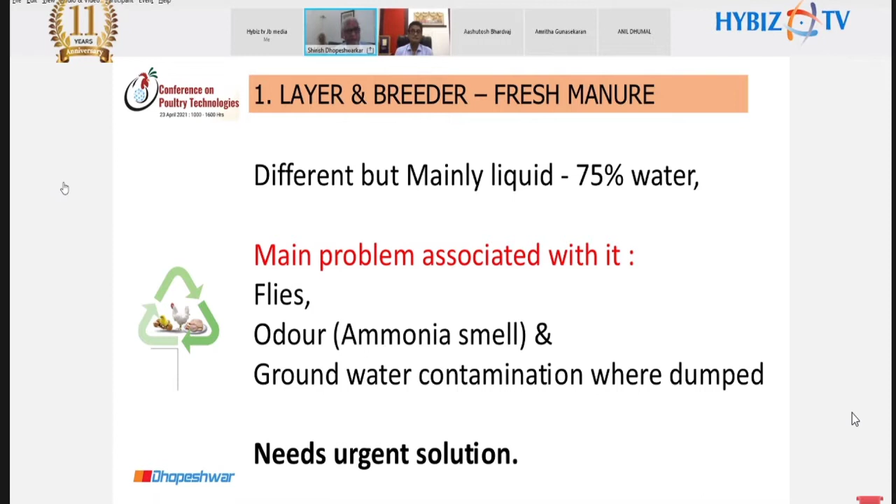Of water, it will leach into the ground and it will damage the groundwater in that land where it has run off. So this requires an urgent solution.

For example, layer manure. Layer farm of 1 lakh birds, as I said earlier, equals 10 tons of fresh manure per day, equal to 3,650 tons per year. And big farms have 3 to 10 lakh birds. Some companies have even more.

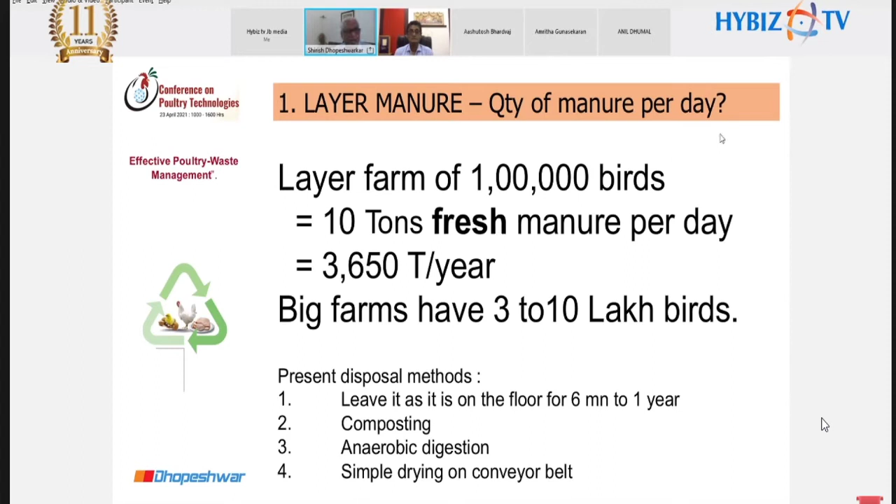So present disposal methods: they leave it as it is on the floor for 6 months to 1 year. Some use some part for composting, some go for anaerobic digestion, and some simply dry it on a conveyor belt, which is one of the old technologies, but not very effective, and it takes a long time to get it composted.

The breeder farm manure is slightly more fibrous and slightly different in physical nature, but both have water as the main ingredient, 75% water. It is not 75% moisture, 75% water. That means in 100 kg of this fresh manure, the solid content would be hardly 25%. So what we call it is DM 25, dry matter 25 in the manure.

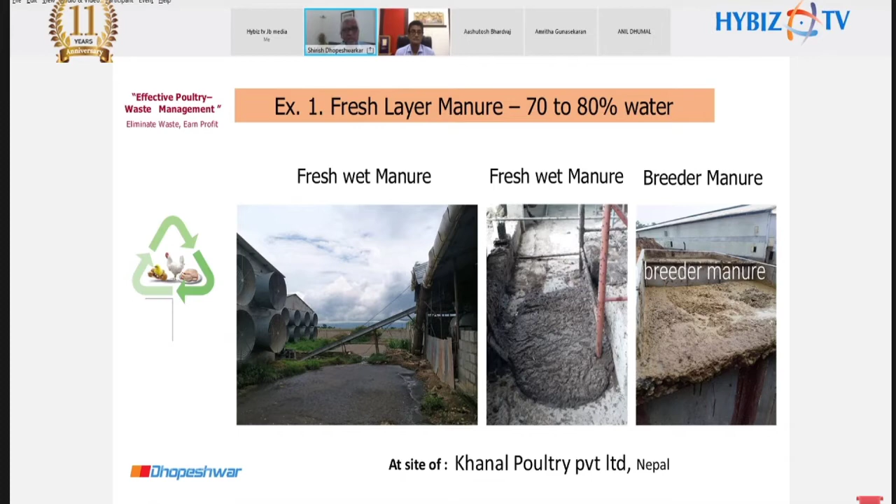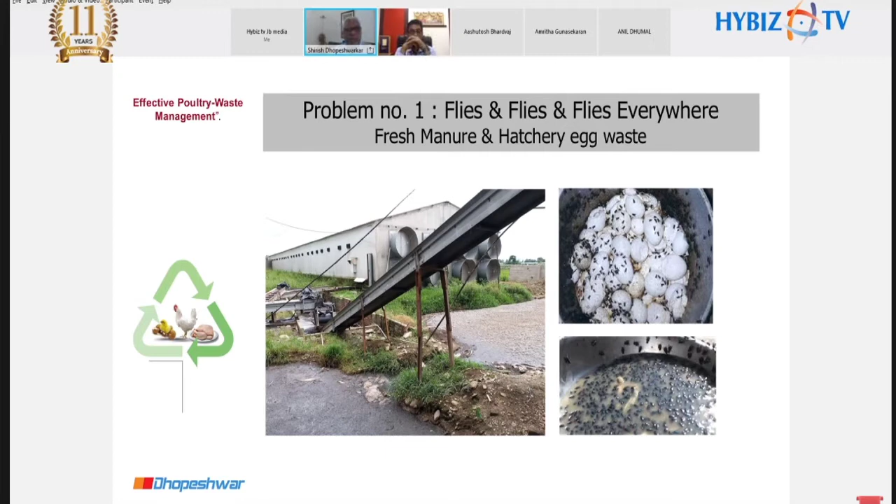And what are the problems associated with this manure, even at the farm level? Problem number 1, there are flies everywhere, both on the fresh manure as well as on the hatchery egg waste. And if you are thinking flies are the only problem from poultry manure, you would be shocked. It is not. Other problems are ammonia odor. It affects not only the birds in the shed, it affects the people nearby, the groundwater contamination, as I said earlier, and the bacterial contamination.

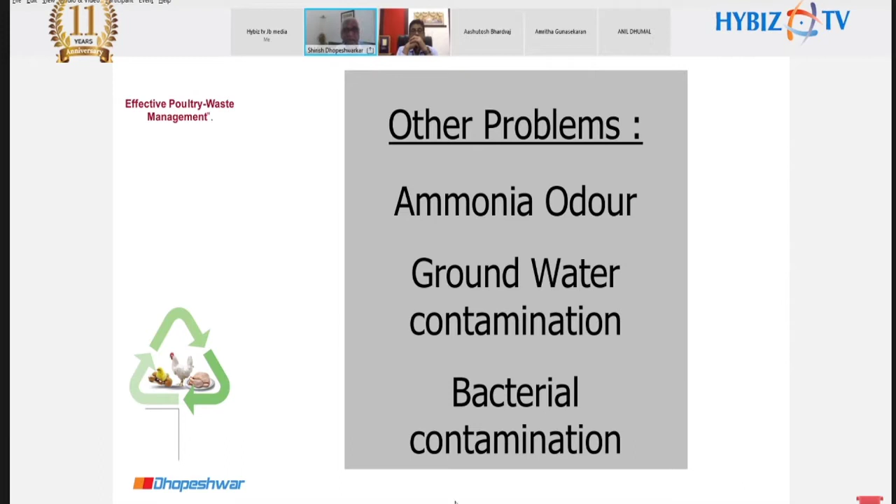Other problems due to poultry waste: we all know poultry waste is somehow being disposed of unauthorizedly, illegally. They simply throw it in the fish ponds, and the fish eat chicken which has live bacteria in it, and the fish comes back to the consumer's table. We have no doubt our cooking involves very hot cooking and pressure cooking and all that, but it still comes onto the table near to us. Similar problems are faced due to hatchery waste and slaughter plant waste.

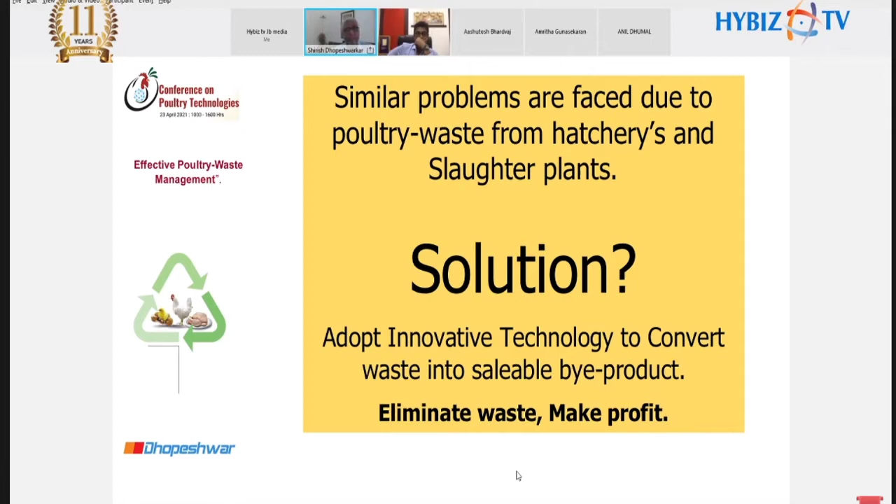And so what is the solution? The only solution is to adopt innovative technology to convert waste into a sellable byproduct. So the solution will eliminate the waste and make profit. One of the solutions would be the digester-based clean and green technology for converting poultry waste into sellable products.

And the sellable products: manure to organic fertilizer, hatchery waste to eggshell meat meal, slaughter waste to meat meal. The meat meal made from slaughter waste has approximately 55 to 60% protein and 20% fat. It can be used to the extent of 10 to 12% in feed; where we use soya cake, you can substitute some part, and where you use oil, you can use it because that gives energy.

So the solution involves an advanced 3-in-1 digester. This is a 3-in-1 digester because it is a pressure cooker and it is a homogenizer. You see the front end and you see the back end. The back end extends to a heavy duty stirrer and gearbox, which drives the heavy duty stirrer inside to homogenize.

So when you cook the slaughter waste under pressure, for example, the feather gets hydrolyzed under pressure. So all the waste, from the bones to intestine to feather, gets homogenized. And when you get the meat meal out, it is a homogenized product without a trace of feather. So this digester is a pressure cooker, it's a homogenizer, and in the case of this particular digester, it's a vacuum dryer.

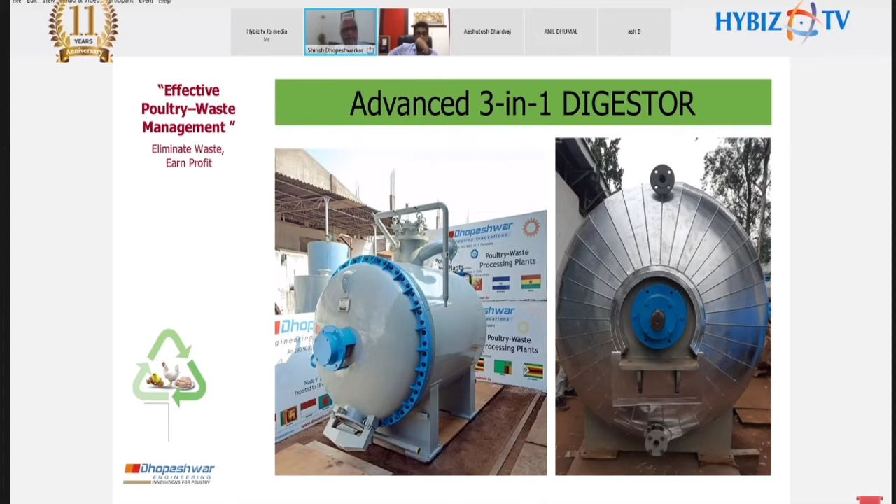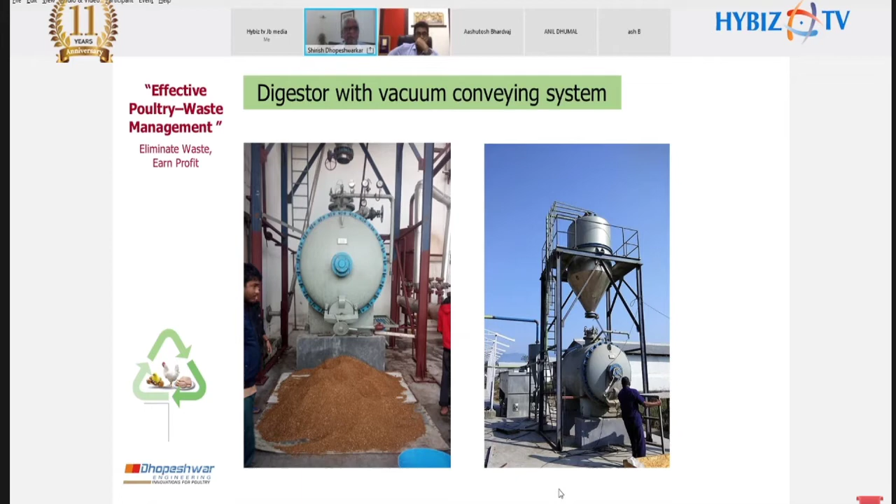And what does this digester-based technology do? It adopts HTST process, high temperature, short time process, to pressure cook poultry waste, eliminate bacteria, homogenize and sterilize waste, and vacuum dry the waste into final product. Here, I would like to just explain a bit.

The bacteria in poultry waste, the Salmonella and E. coli, as per the EU norms, need to be eliminated at about 120 to 140 degrees centigrade by keeping the temperature constant for about 20 minutes onwards. So this pressure cooker does that. That's why it is high temperature, 120 to 140 degrees, and short time, 20 to 40 minutes.

So it is HTST. And this plant consists of, number one, the homogenizer cooker dryer, a steam boiler, an odor control system, a vacuum system for energy efficiency, a dry meat meal bagging system, and other peripherals.

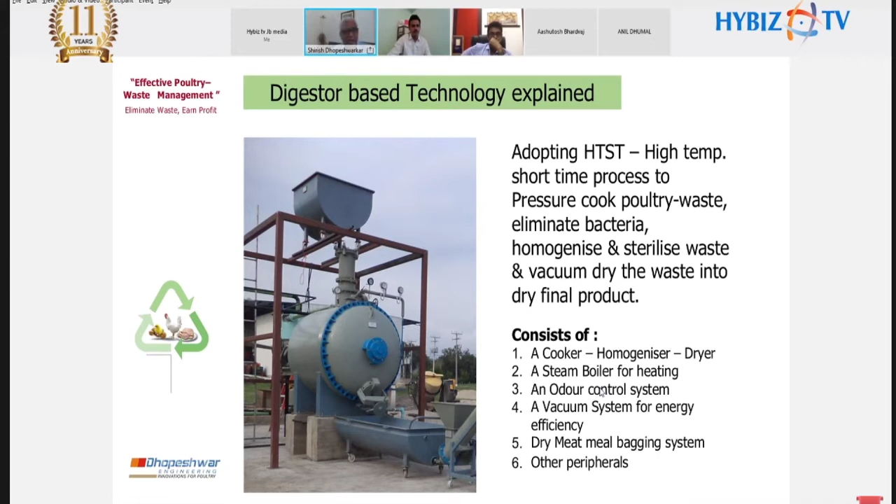Solution 1 for the poultry waste management for, say, fresh manure. The digester-based technology converts fresh liquid manure into dry, baggable powder or pellet on the same day. The problem with manure is you cannot store it. If you store it, it will attract flies and also give a lot of smell, and it will also give groundwater pollution. So you cannot bag it, you cannot keep it. So if you can make baggable powder out of it on the same day, it would eliminate the waste at its source on the same day.

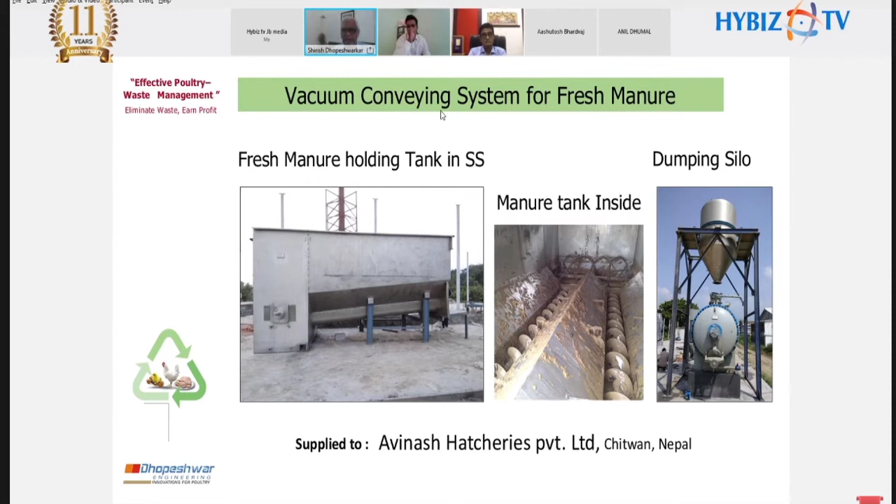This is the vacuum conveying system because they have about 30 tons of manure every day. And loading the manure manually is simply a very difficult task. So this is a vacuum conveying system which goes from the floor level stainless steel tank with the screw conveyor, and ultimately with the vacuum it is conveyed to the stainless steel silo located on top of the digester. So the vacuum conveying reduces the labor and does it without really involving labor and all the dirt associated with it.

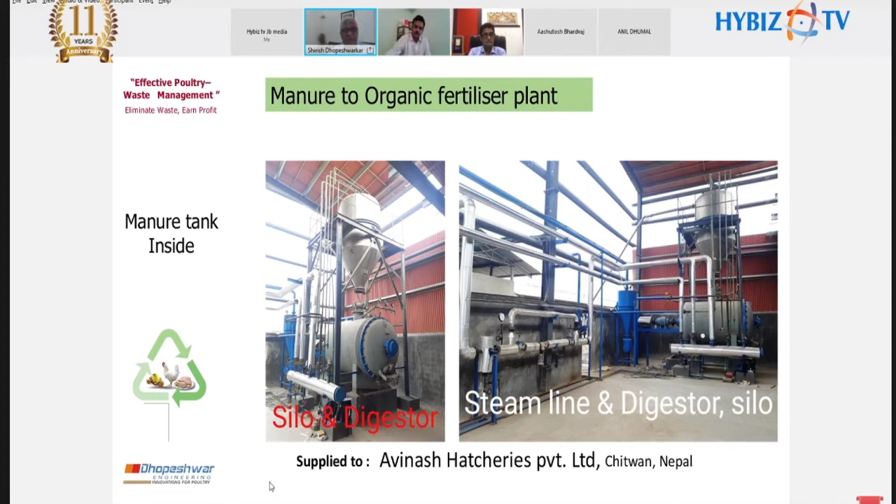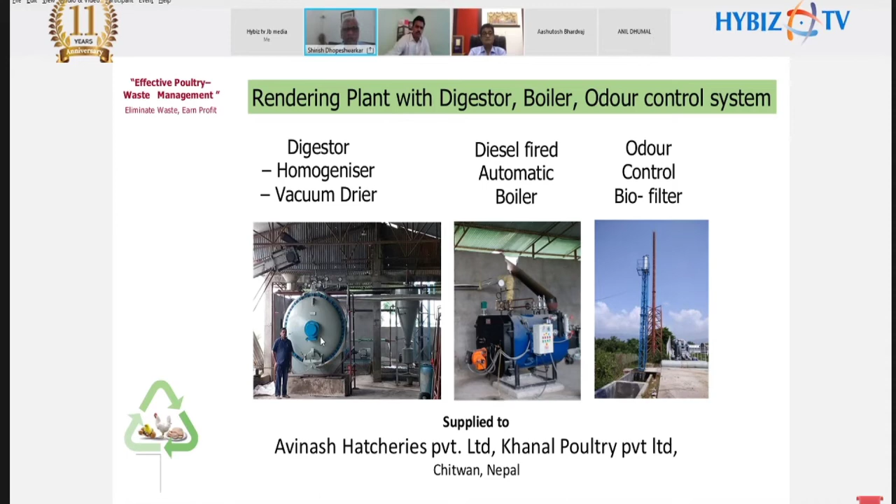This is the system again at the Avinash Farm, Chitwan, Nepal. You can see the plant, the shed, the boiler system, which is on another shed. And as I said earlier, the different components of this system are the digester homogenizer, the boiler, and the odor control system, which has a unique 32 feet high barometric tower to take the vapors there and condense it. So whatever vapors are condensable, they are condensed, and you do not get the smell in the plant or around the area. So it's a very effective odor control system, and these have been set up in different countries.

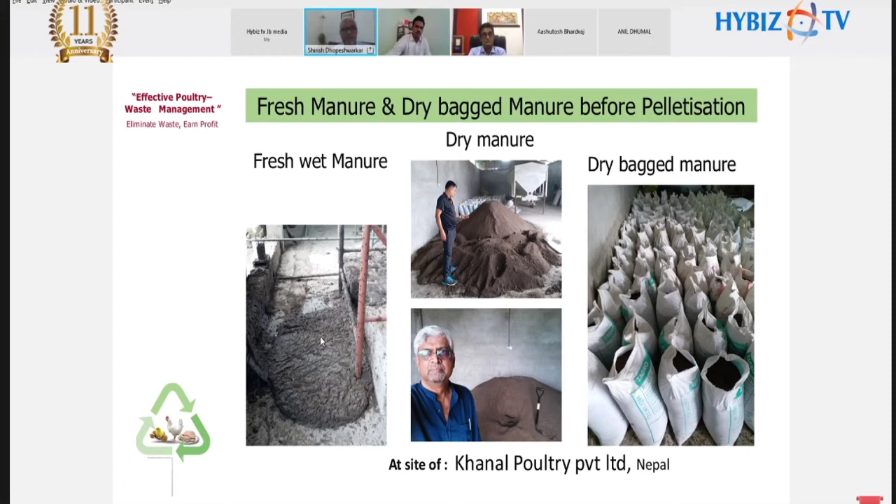What does the dry manure look like? Fresh manure looks so wet, it's slushy. The dry manure you can see, and it has been bagged. You can bag it the same day, you can bag it after cooling, but basically you can bag it, store it, keep it.

So with the bagging, you can also go to the next level, which is pelletizing. Pelletizing is required for marketing the poultry manure, because the adulteration will be very less. And you can do the pelletizing as you can see in the photographs. So the pelletizing reduces losses and it reduces chances for adulteration.

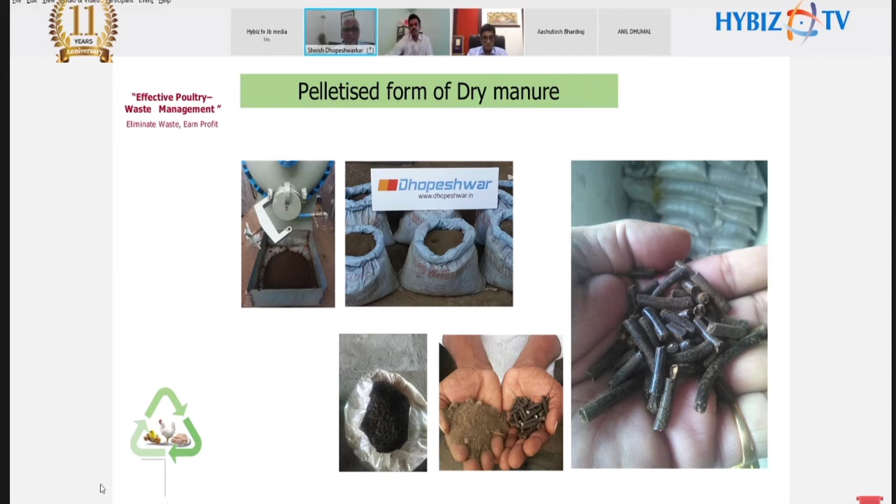And most important, the nitrogen, when you broadcast the pellets in the farm, the nitrogen in it is released slowly. When you water it, the nitrogen gets released slowly, not at a time, slowly. So that helps the plant to absorb it. So you can say pelletizing, in fact, gives a much better value than just dry powder.

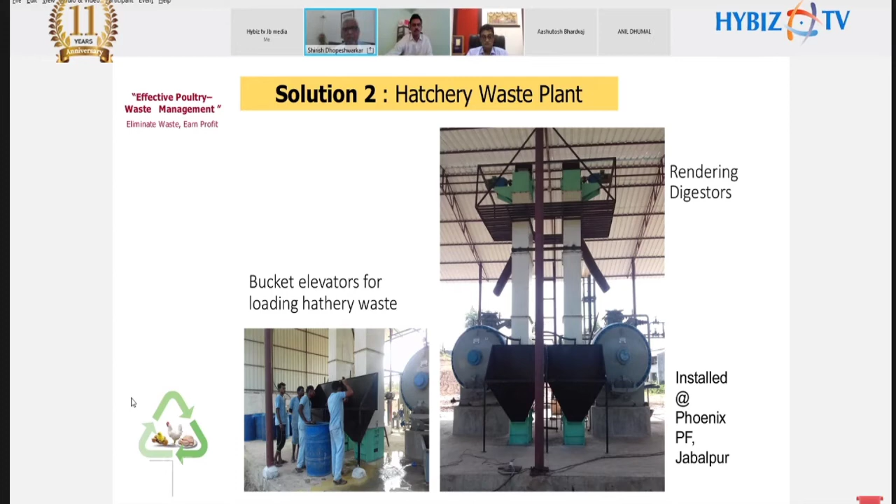Solution 2 for the second waste is the poultry hatchery plant. These are the plants at Phoenix Farms, Jabalpur. You can see the bucket elevator for conveying and also the digester for hatchery waste. These are the hatchery waste plants at Venky's, Ludhiana and Allahabad, and S.R. Hatcheries, Hyderabad.

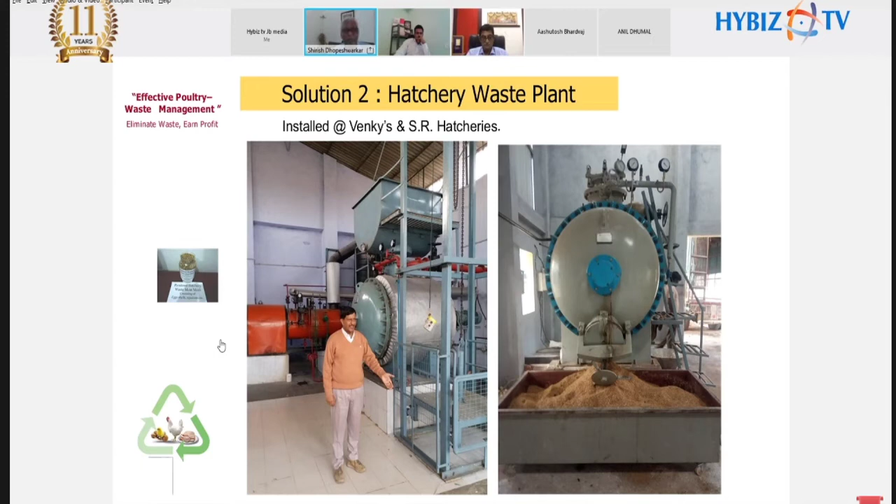It gives out a dry egg waste meat meal, because egg is a major component. You put in all the unhatched eggs, day-old chicks, rejected chicks, and what you get is a calcium-rich meat meal. It has about 20-24% protein, lower than the meat meal from slaughter waste, but it is still a sterilized form of meat meal, and hence world over it has been used by nutritionists in feed formulation.

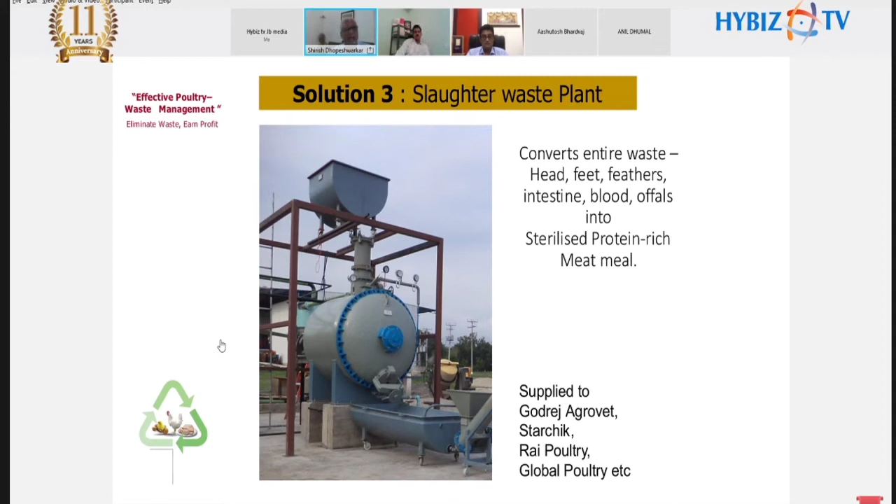The third solution is the slaughter waste plant. As I said earlier, slaughter waste plants have been supplied to Godrej Agrovet, Starchik, and many other companies. And what you get is again an oil-rich, protein-rich waste meat meal.

And coming towards the end, why is it called a clean and green technology? It is called so because it has a 3-in-1 advanced digester, which is, as I explained earlier, cooker, homogenizer, and vacuum dryer. It has an advanced odor control system, so no odor or foul smell during the entire process plant operations.

Zero discharge. Whatever water you get after removing the water can be simply filtered and released for irrigation. No stagnation or holding of poultry waste; waste eliminated the same day, sellable byproduct the same day.

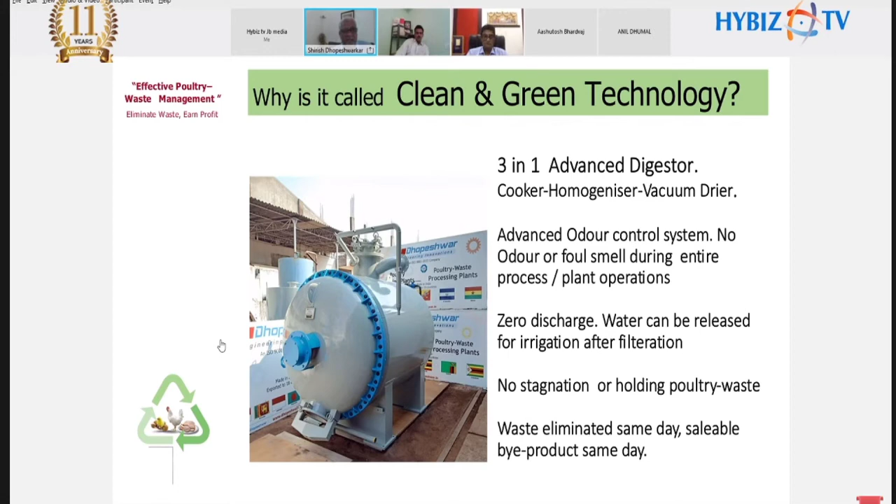And this is the advanced odor control system. It's a unique one. It has a barometric tower, 32 feet high, and the entire operation is done under vacuum. So it controls the odor in a perfect manner.

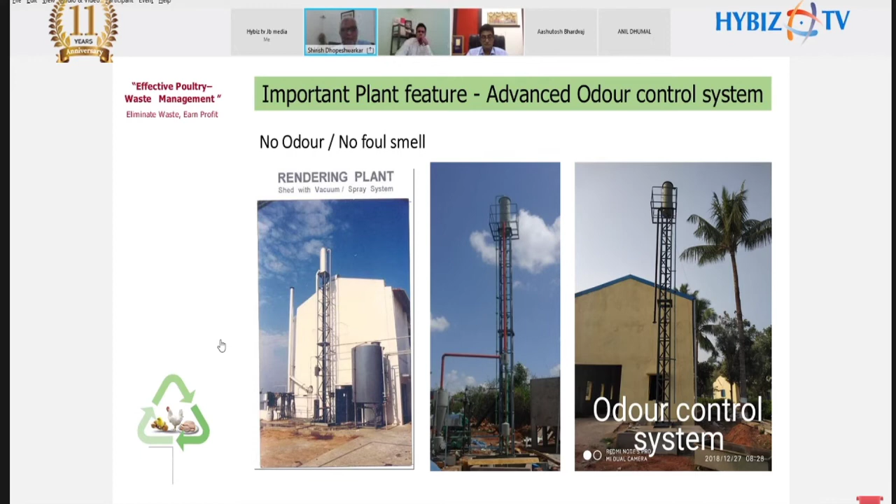You can simply put up a nice armchair in the plant and take a nap. I'm telling you, many have tried that and they have confirmed. They laughed at me when I said it, including 25 years back. We had some visitors from Godrej Agrovet, and they laughed when I said it, but when I took them to the plant they realized. They said, yeah, it smells like Bournvita, and that's how it is controlling.

Number one, they don't have to be afraid of the nuisance or the waste. They can treat it. It is a revenue surplus model. It will not give as much profit as your main business, but it will strengthen your business because it eliminates waste, makes your farm friendly for the communities nearby, and you get a second revenue stream. So, tangible and intangible benefits. Tangible benefit, as I said earlier.

Sorry, Mr. Dhopeshwarkar, sorry to interrupt you. We are running out of time. One minute. One minute, I'll conclude it.

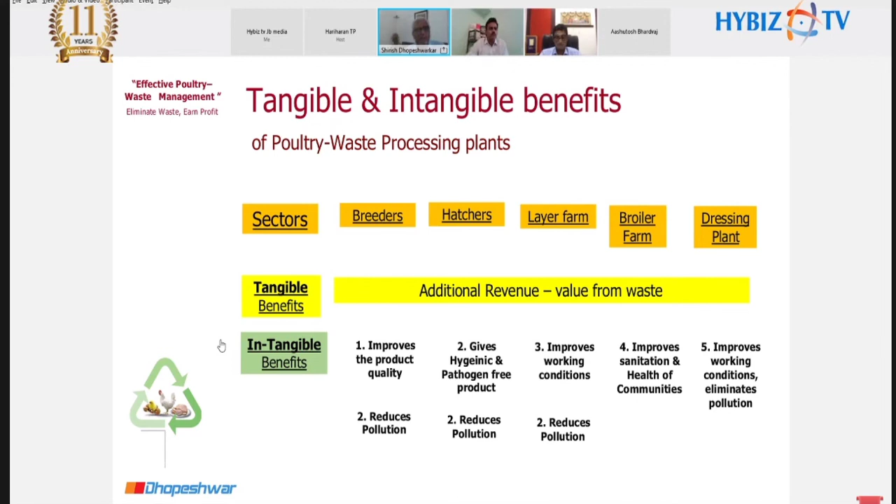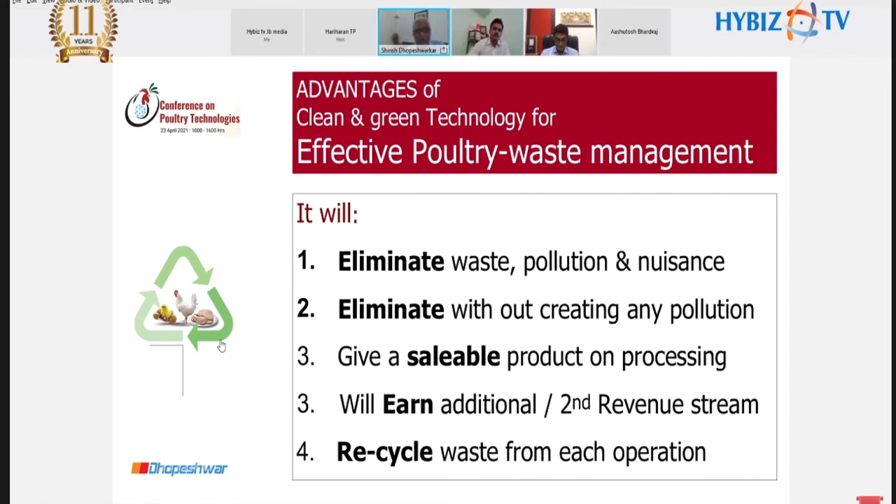Additional revenue, that is value from waste, and the intangible benefits: it improves the product quality, it reduces pollution across all the sectors. So in conclusion, the advantage of clean and green technology for effective poultry waste management: it will eliminate waste without creating any pollution, it will give a sellable product, earn additional second revenue, and recycle waste. These plants are available in different capacities and types, which we can discuss later on. As of now, it has been supplied to about 20 countries around the world.